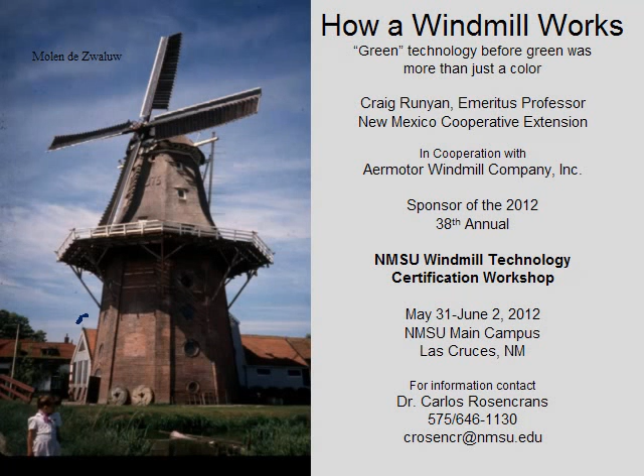I have actually had the opportunity to visit that windmill in Holland that you saw the picture of a couple of times, and it's impressive if you ever get a chance to visit one of these old world windmills. It's very awesome, the work that they made those old mills do, from sawmills to grist mills. You name it, they could find a way to make that wind do the work for them.

But it wasn't until the late 1800s that the modern conventional windmill was developed here in the U.S., and it sort of went side by side with the development of well drilling. As well drilling, or in some cases even well digging, was improved, there was an obvious need for a better windmill, something better than the windmills that had been around for so long. The wooden mills, the canvas mills—there was a recognized need for something more efficient. And the steel-bladed windmill that we have today was designed around 1880 to 1900, and really became popular right at the turn of the century. That particular windmill was some 75–80% more efficient than what had previously been used for water pumping, and has essentially been unchanged in the past 120 plus years. It's the same windmill we use today, and it's hard to improve upon it.

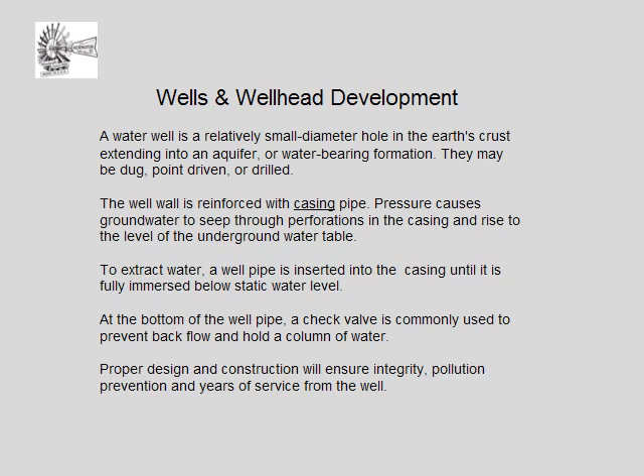Having been in extension and worked with water quality programs and pollution prevention programs, I'm somewhat sensitive to what you need to do for your well in order to keep its integrity and keep the water you draw from it safe. Some particular hints: one of the most important is to have that well separated from any risky land use activities—livestock pens, septic tanks, oil pits, or anything that would cause concern or risk to the groundwater below surface.

One of the most valuable resources for good well maintenance and protection is called the Farm-A-Syst program. Most of you have it in your state. It's a self-assessment program where a well owner can assess the risks located around their own private well, and it's used for other types of wells, like municipal wells too. Where we're dealing so much with source water protection and environmental concerns for protecting our groundwater, which belongs to all of us, these issues become critical, and there's quite a bit we can do toward protecting that groundwater.

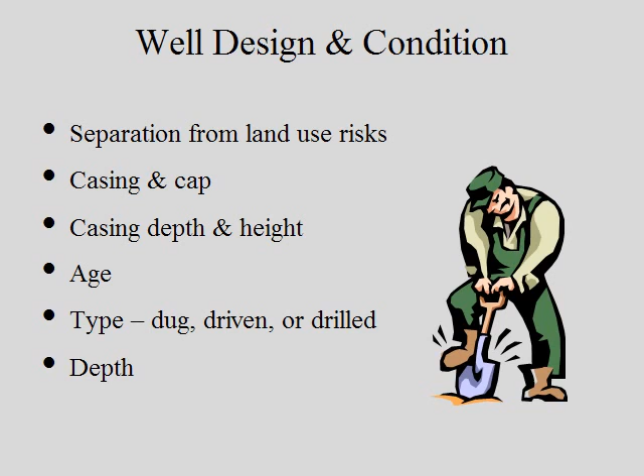Some of the basics: the casing should be strong, usually steel, sometimes plastic PVC casing. It should penetrate the water table sufficiently to avoid future problems if the water table should drop. It should be screened—oftentimes you find an open hole at the bottom, just an open bore at the bottom of that casing. Toward the surface, it should be grouted around with a pad built around the casing at grade. That goes a long way toward protecting against any inflow into the well that might contaminate the water.

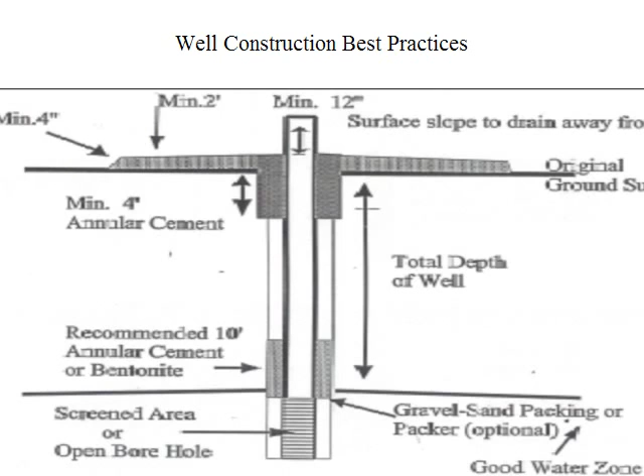Lateral groundwater movement toward that casing could provide a big risk to your groundwater if that seal between the casing and the earth is not well made. So that's something you want to pay attention to. But that's sort of my extension soapbox, and we like to see our well owners pay attention to some of these issues.

Water quality testing, of course, most of you know about—recommended once a year, maybe more frequently if you have problems. But if you know there's a problem with the well, try to locate the source and deal with it. Then proper abandonment if the well's not going to be used for more than 3 years. Here in the West, most states say if it hasn't been used in 3 years, it is considered abandoned. So know what your local statutes say and take care of your water.

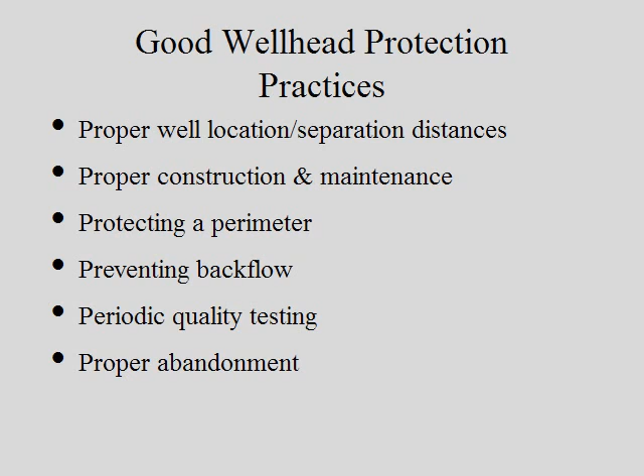We find today, with people looking for alternative energy sources for pumping water, that many are deciding whether to go with solar PV panels or a conventional windmill. I should preface this by saying that a lot of people considering windmills think they might also get electric generation off that windmill as well as water pumping. Our basic response is that water and electricity do not mix, and there is nothing available on the market today that will do both jobs. You can get a wind generator or a windmill for water pumping, but not something that does both - the technology isn't there yet. Perhaps someday, but we're talking just water pumping windmills here.

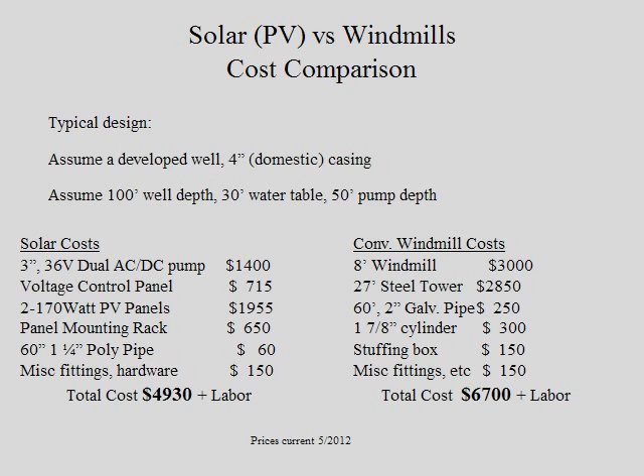Average 8 hours per day of solar radiation sufficient enough to drive the pump, and 8 hours a day, depending on what part of the country you live in, may be more than you get. It just depends. Sometimes in the middle of the summer, we wish we only had 8 hours in New Mexico, because by about 5 in the evening, it's pretty darn hot out here. But if you have it, you can realize as much as 6.5 gallons a minute with that setup. So 60 minutes times 8 hours of potential pumping per day is something more than 3,000 gallons of water per day.

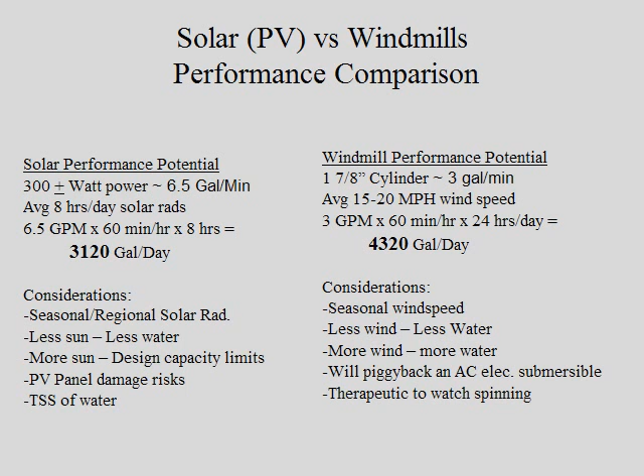This is not so much important as to how a windmill works, but one thing that is critical to anybody interested in working with windmills or even working near windmills is the safety consideration. We take this seriously. There's a lot of risk involved, even on the ground, working with steel overhead and cranes in motion. This is an important issue that we emphasize in our school and with all our colleagues — don't take it lightly. We don't like accidents on these windmills, and the wind is unpredictable. When you're on these towers, you have to expect the worst is going to happen. So fall protection, tie-on protection, everything you can do is probably not enough to provide your own safety.

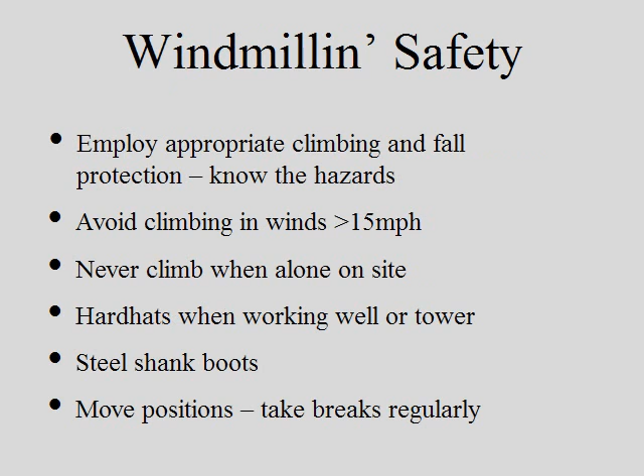It should be some 20 feet or so above any obstructions within something like a 100-foot radius.

Okay, we've got an answer to the question about why most towers are 27 feet. An individual says it can be reached with a standard ladder for maintenance. Actually, no, that's not it. It's a matter of convenience. The 27-foot tower is there to help you put 20 and 21 joints of pipe in the ground. The pipe has to go inside the tower before it can go down the hole. If you've got too short a tower, you've got a problem, unless you want to go to the expense of cutting that pipe and threading it to fit inside the tower. We like to see 27-foot towers. That gives you room for apparatus, pulleys, and hooks at the top of the tower, and the ability to use 20-foot joints of pipe and sucker rod, as you'll see here in a minute.

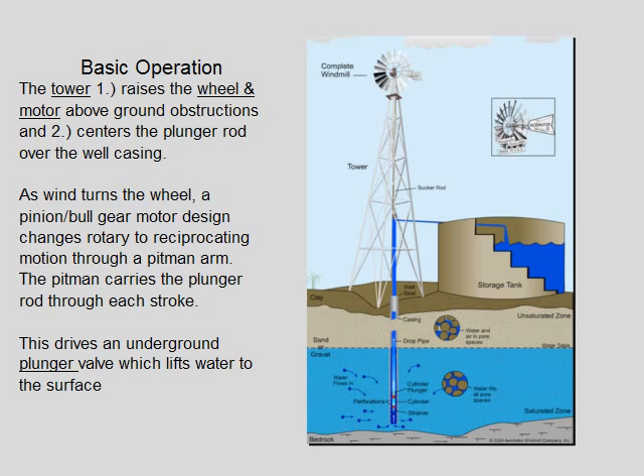Okay, main components of the windmill. The wheel and motor, as I've mentioned, are on top. The wheel and motor are designed so that it has a dampening effect, so that the tail will help move the wheel out of the wind. I said earlier these things will operate in gale force winds, and they literally will, because they have this dampening effect where, with a spring-loaded arm, the tail of the windmill will turn the fan out of the wind to prevent it from damaging itself.

It's a wonderful feature where we can leave these things turned on without worrying about them flying off the top of the tower. They don't do that. It would take, and I'm not exaggerating, it would really take gale force winds to cause any damage to these things, as long as they're anchored well in the ground. We've seen them actually survive tornadoes and come through with no scratches.

The tower, and well, let me back up a little bit. The wood rod that is essential on all the windmills is a device that's used as sort of a weak link or shear pin. The wood rod is that connection point immediately below the wheel and the motor that is used in the event that anything wrong happens below ground or above ground, for that matter, that causes an obstruction. The wood rod on the windmill is designed with specific measurements to break and shatter before any damage is caused to the pumping cylinder or the motor gears or anything else.

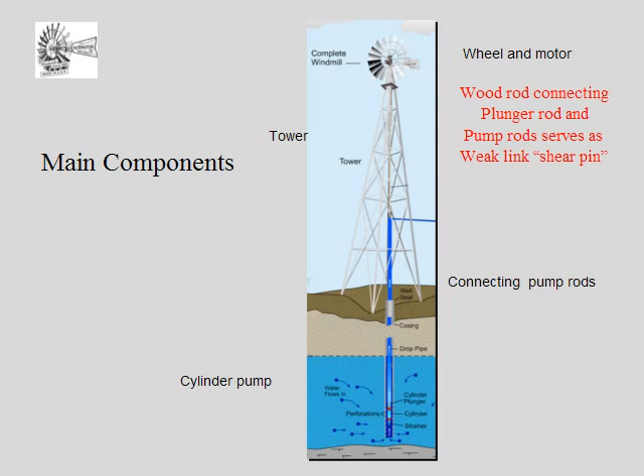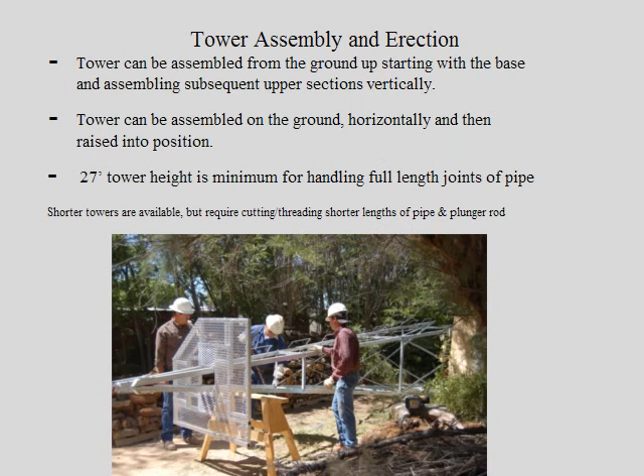Okay, tower assembly. Towers can be built on the ground and lifted, or they can be built one section at a time as you go up. Minimum 27-foot tower for handling full-length joints of pipe. It gets pretty expensive to cut and thread pipe to fit in anything shorter, so the price is a no-brainer.

Towers built on the ground can be just lifted with a hoist if one's available, if you can get one to the site. And they can be done by hand if you have enough manpower. There's all sorts of methods and techniques for lifting these up, just using ropes and cables and some simple safety, and a lot of people.

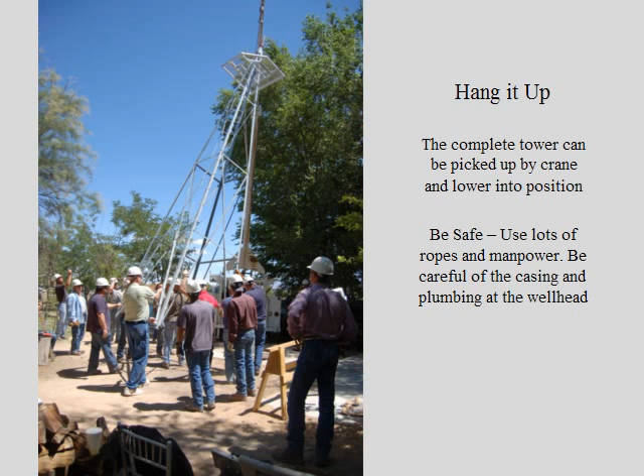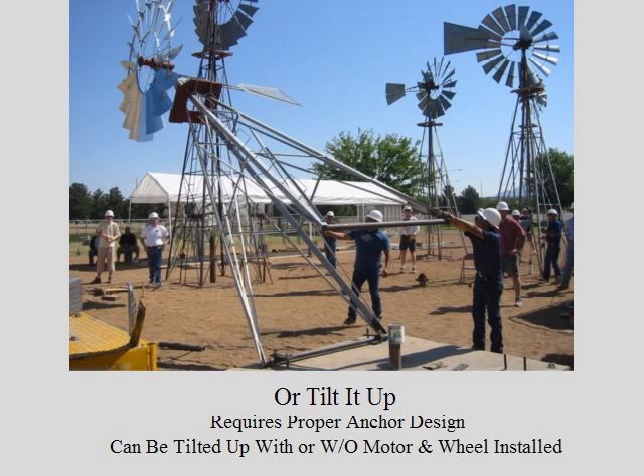Very good way to do it, very safe, highly recommended. Here's where we plumb and level. Once that tower is up, then scooting it around back and forth using a plumb bob to get it right center over the well. If you spend the extra time to do this, your windmill will pump without problem indefinitely for a lifetime or more.

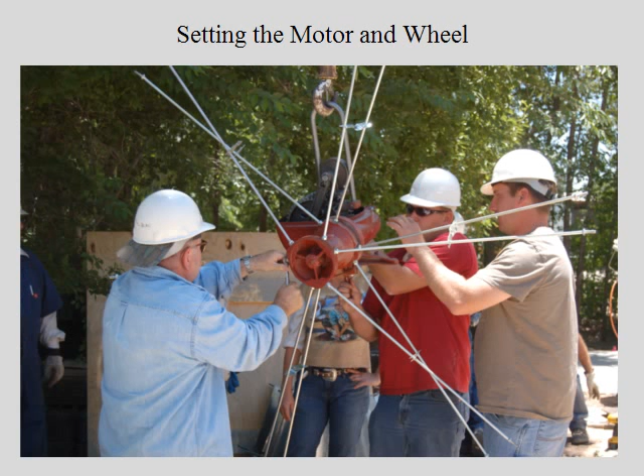Here's building the wheel and the tail before it's put on after the tower is set up, and this can be done fairly well if you've got a small A-frame, or even find some way to hang it up in the rafters of your barn or something. This little mill is not that heavy, maybe 300-400 pounds. I don't remember the weight of them, but they're not that heavy. And with the wheel on there, total weight of that thing is not something that you can't deal with. They're cumbersome, obviously, but they're not really that heavy.

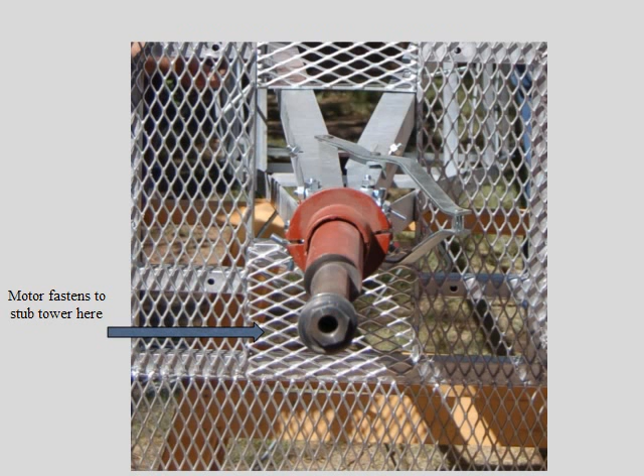And here's where that motor would fasten onto the tower. This is what we call the stub tower. That threaded nut is removed, the motor slips right on, and you just bolt it right back on there. This is easily done on the ground. It's easily done in the air if you've got a way to lift that motor up too.

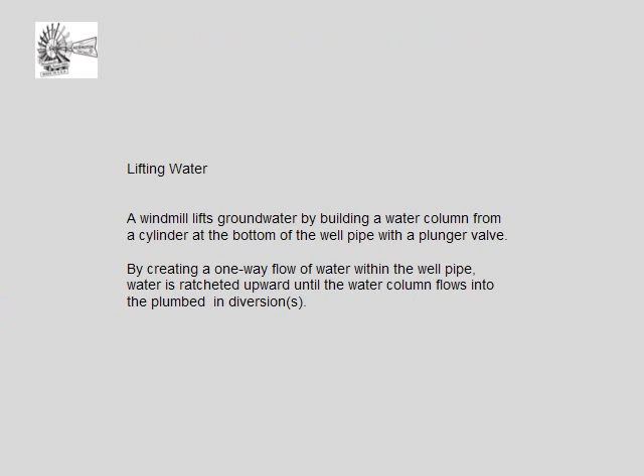The windmill builds the column of water connected with the plunger rod into the ground at the cylinder. It builds a column of water one stroke at a time up the well pipe. It's ratcheted up every time the wheel turns. It causes an upstroke and a downstroke on the plunger, and that's what lifts the water up the column. You see the water column here coming from the cylinder at the bottom of the well pipe.

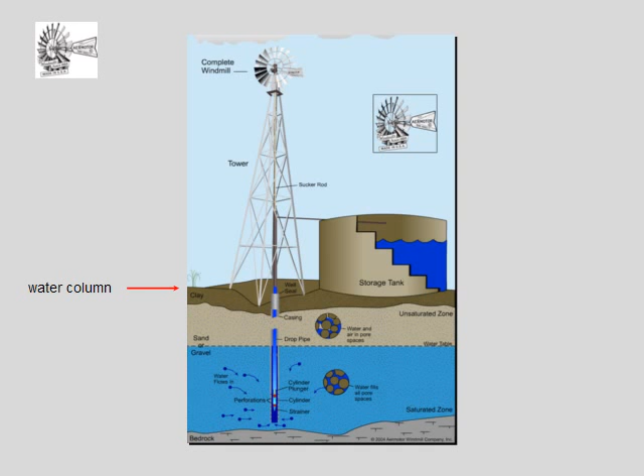It's lifted one stroke at a time until it reaches a point of diversion, and a lot of times what we call this is just a tank pipe or a drain pipe. If you use the stuffing box that I mentioned earlier, then you can divert it and send it even higher than the windmill itself. These windmills are capable of lifting water literally hundreds of feet. The deepest we could lift, or with the most head I should say, is somewhere around 1,000 feet elevation. So with a proper apparatus, that being a stuffing box on top of the well pipe, we can lift this water up several hundred feet above the height of the windmill itself.

This is common setup in the West, where we've got hills and mountains, and we've got livestock tanks at the tops of those hills and mountains, we have to be able to pump water up the hill. And the hydraulics of it is that an incline adds to your head pressure. Declines take away from that head pressure. So if you're going downhill, it's a gain. If you're going uphill, it's a cost. But being able to pump 400, 500, 700 feet elevation higher than the windmill is a great advantage if you decide to use the stuffing box.

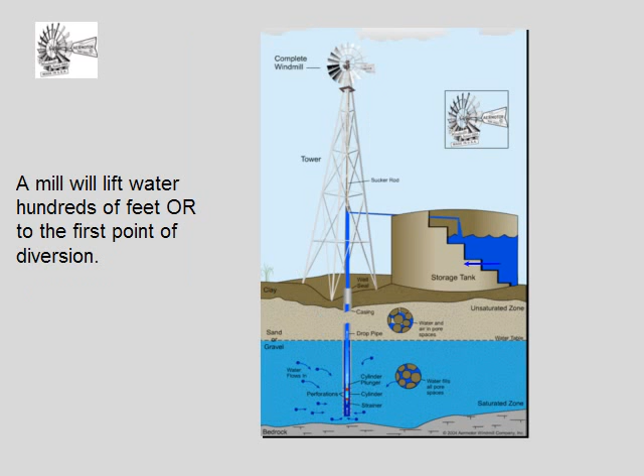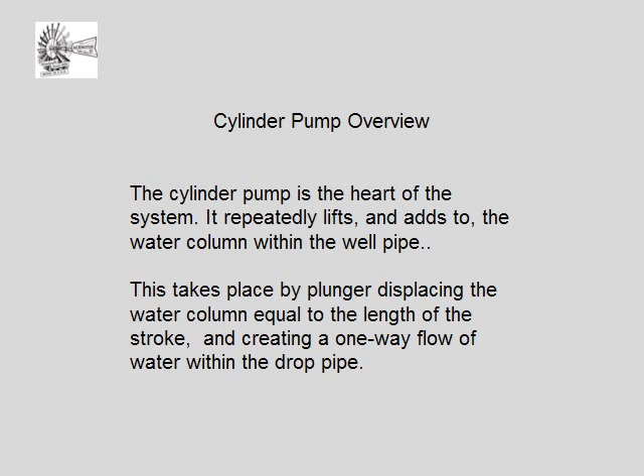The cylinder pump is the heart of the system. It ratchets and lifts water repeatedly back and forth. It consists of a top plunger and a bottom check valve. Simple operation: pressure from the water column in the pipe, water trying to go back down, causes the plunger valve to close and seals it. As the upstroke of the windmill pulls the plunger up, it lifts water the distance of the windmill stroke, which is variable.

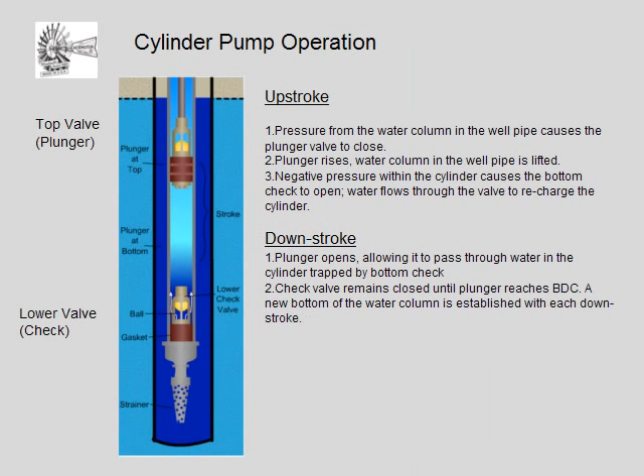Water rises up the column and goes to its diversion point. Negative pressure within the cylinder, because it's lifting that water, will open the bottom check valve and allow groundwater pressure to force water into the cylinder. Then on the downstroke, the top plunger valve opens and passes through the trapped water in the cylinder, while the bottom check valve closes and prevents that water from flowing back out. Once the plunger reaches bottom dead center, you're ready for a whole new upstroke—that's what's meant by a new bottom of the water column being established each cycle.

Here's a more graphic illustration. You see the check valves, the yellow balls, on the left-hand side with both valves closed when there's no wind blowing. Those valves hold the column of water in the well pipe, so that as soon as the wind starts turning, water is right at the surface and ready to flow. On the upstroke, the plunger valve is closed and the check valve is open, lifting water up the column and bringing water into the cylinder as the plunger rises.

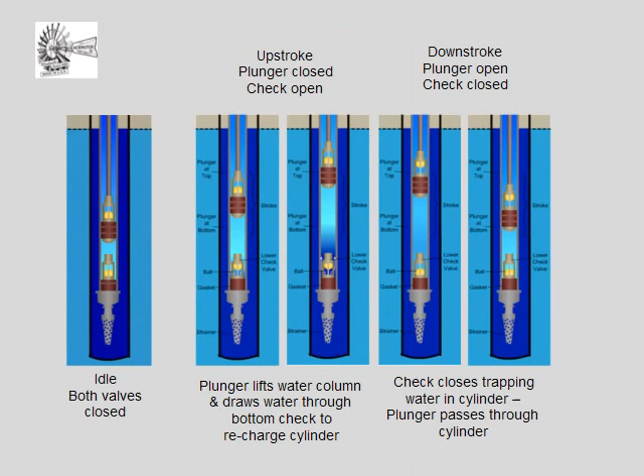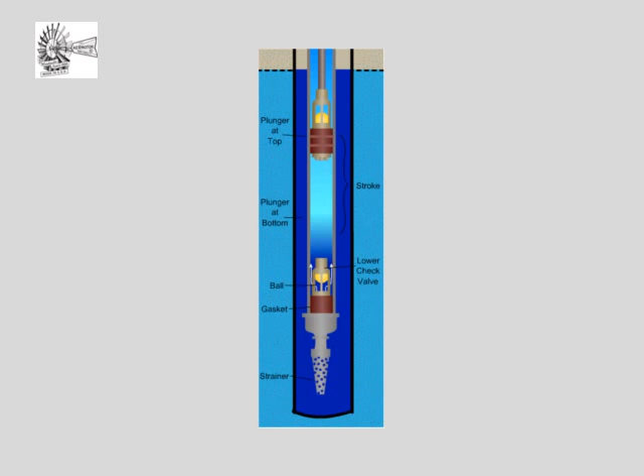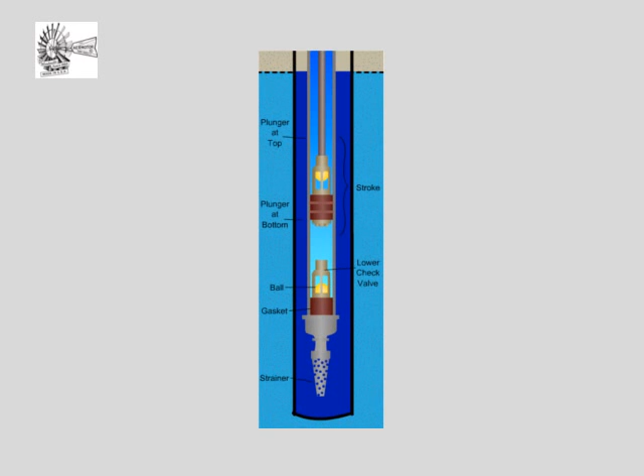On the downstroke, the plunger opens so it can pass through the newly trapped water in the cylinder, while the bottom check valve closes so water can't flow back into the ground. Here it is idle, upstroke starting, valves in position, plunger closed, check valve open. Plunger still closed—this is top dead center, as high as the plunger will rise, that's its stroke. Downstroke begins, the top plunger opens, the bottom check valve closes and traps the water from flowing out. Almost bottom dead center here, and you're ready for a new stroke. One stroke at a time—that's how it's done.

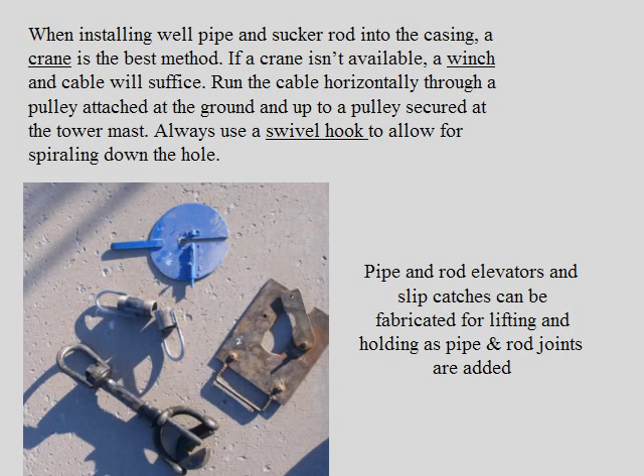Important thing: always use a swivel hook. When you're using a cable, even on a crane or boom, always use a swivel hook, because once it passes below the surface, you have no idea what's going on down in the hole. They spin and ratchet and spiral around, and if you don't have a swivel hook on there, you can find yourself in trouble.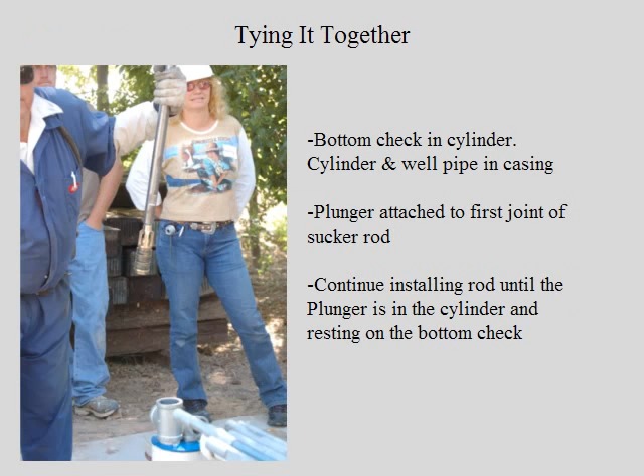Here's a picture of the plunger on the sucker rod, about to go down into the well pipe, which is in the hole already installed. It fits into the cylinder once all the sucker rod is in there. Final steps, if you're using the stuffing box: final connections will be made to cut the sucker rod to fit the packer head. With the mill at bottom dead center, you need to know where the stroke of that thing is—that's when you hook up your wood rod. Wood rod is convenient because it's easily cut, doesn't have to be threaded, and fits into a prescribed point on the sucker rod for your final connection.

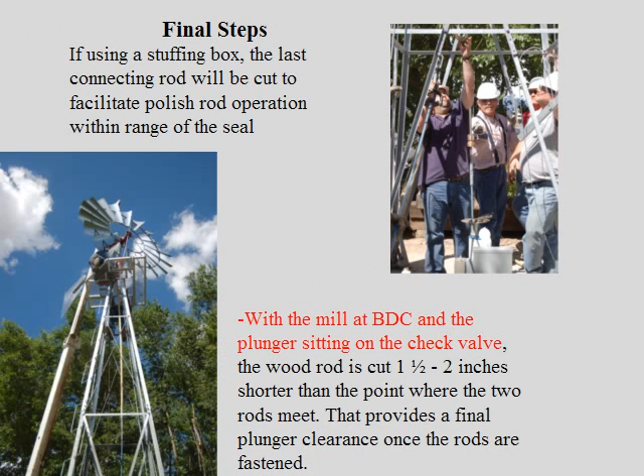These are somewhat important steps we don't have time to dwell on, but if you're interested in doing this, or know someone who is, there is a manual called the 702 Windmill, written by Dr. T. Lindsay Baker. If you have any interest in the practices we've talked about this afternoon, I highly recommend that book. Dr. Baker didn't seem to have much more to do than write about his passion, windmills, and it is the most comprehensive how-to book on conventional windmill water pumping.

This is the windmill that Sergeant Major Hall was partly responsible for getting put up in Afghanistan, and it's a pretty cool picture.